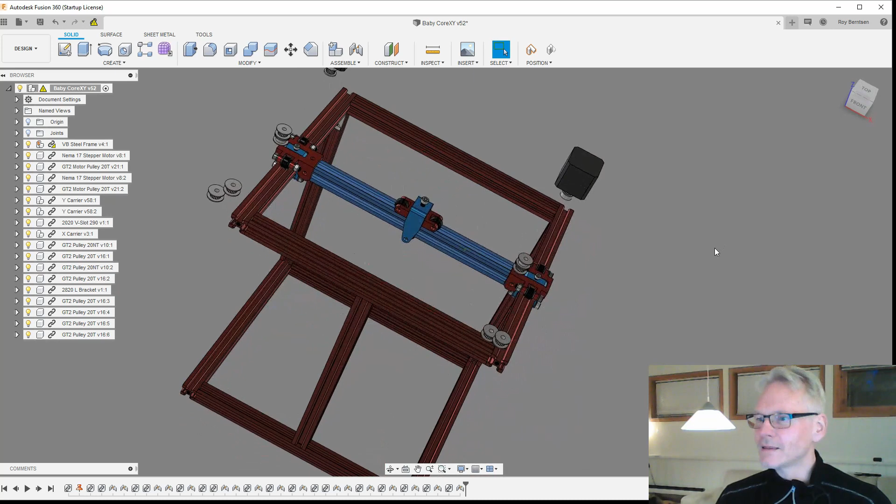So as you see now, the frame looks a little bit different. I would like to have printed parts on this, but not everyone has a printer able to print those big parts. So I decided to let's at least see how it looks like, all framed with the extrusions. So that's what I'm going on.

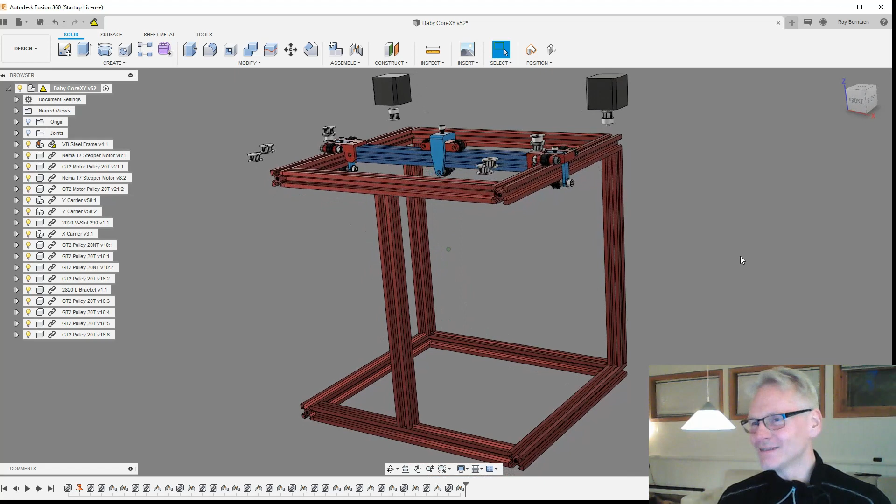I'm still going with the one front wheel. I know you're skeptical about that, and I don't know, maybe it don't work, maybe it does. Let's just figure it out. This is a sketch, and I'm thinking out of the box.

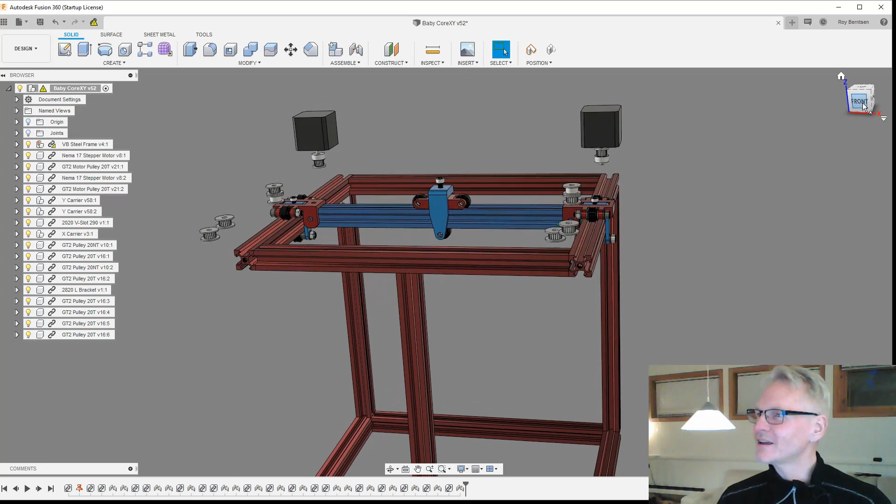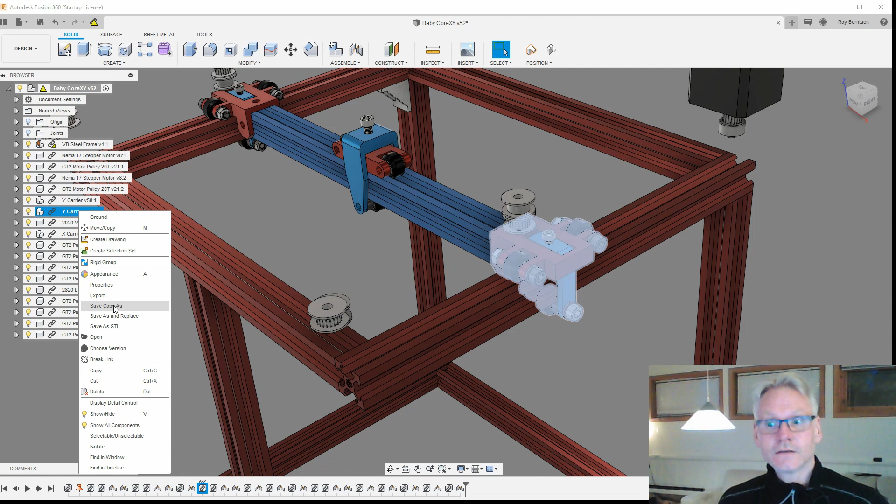If you did see the last vlog, I had some big issues with Y carriers and placement of idlers and the belt path. Everything was supposed to be very simple, quick, easy to print, with a limited amount of support, preferably none. And also, what's important to think about when designing for 3D printing, you need to think about alignment and orientation of parts.

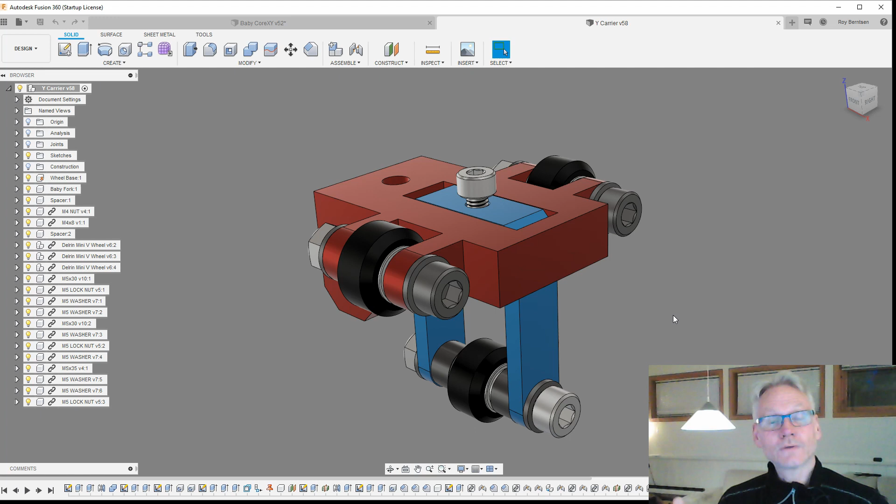I've been through a lot of iterations, and I almost gave up on myself. Then I designed something very complex, too many parts, and it worked. I had the tension screw at the bottom. We can have a look at it.

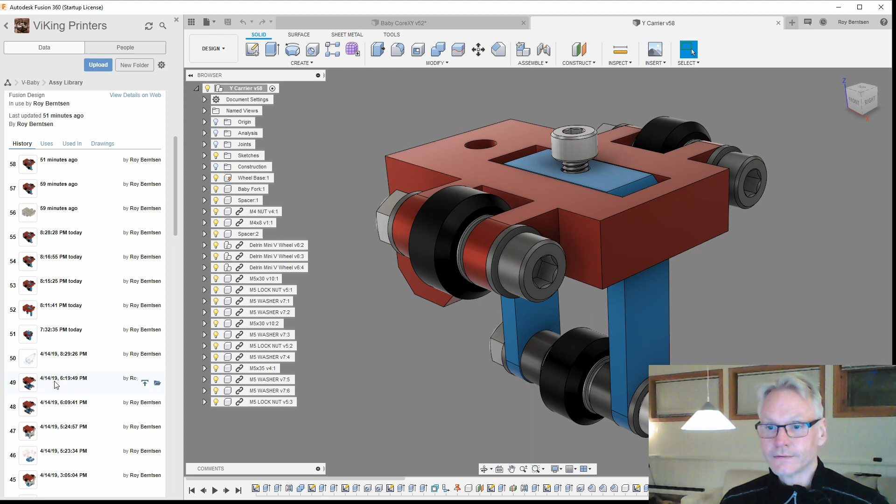As you see, I'm on version 58 now. That just means I saved a lot, too much probably. If we go back to iteration number, let's see, yesterday or the day before, number 49. Let's open iteration number 49 and have a look at that one. So this was something I was playing around with, and it works.

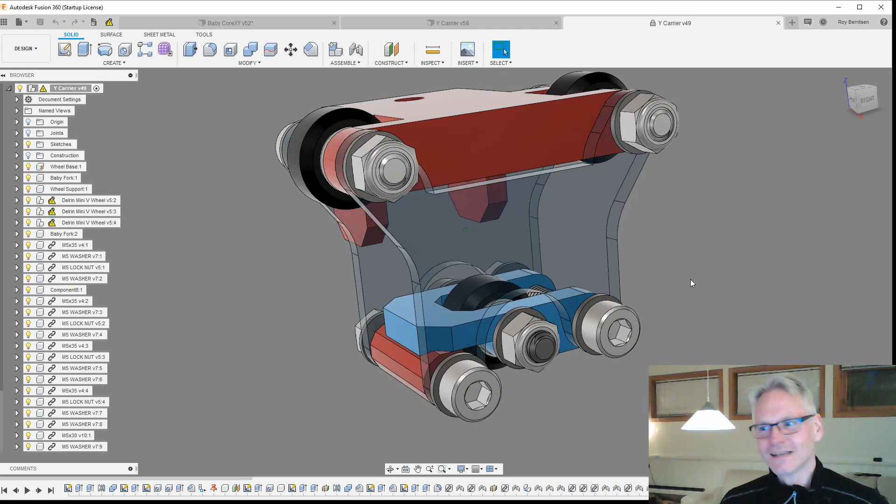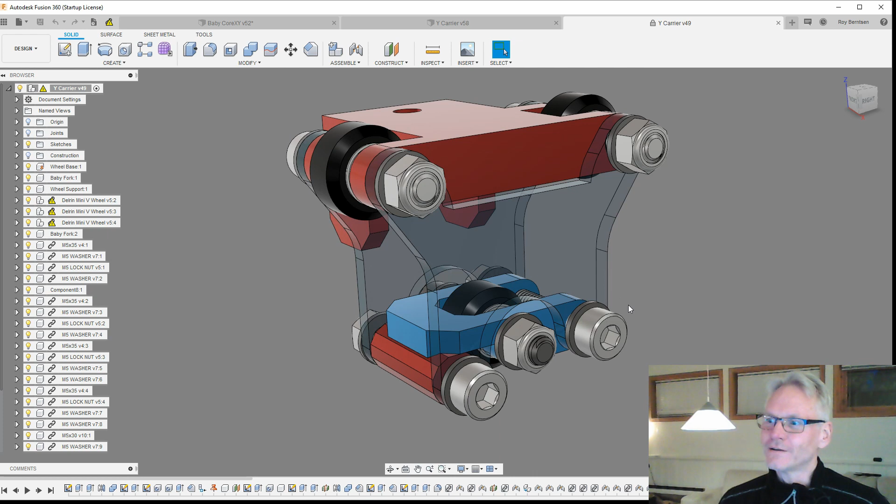I don't like eccentric nuts, eccentric tensioning, and that's why I'm struggling so much, because it will be very easy to just implement eccentric nuts into this design and solve it that way. I don't want it. I had it before and it's a terrible solution. So that's why I have the fork on the Viking. Check out the Viking if you didn't.

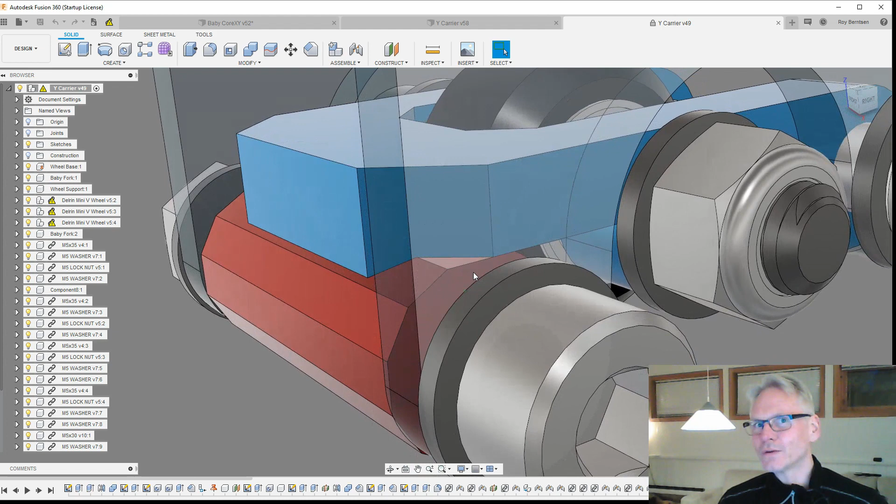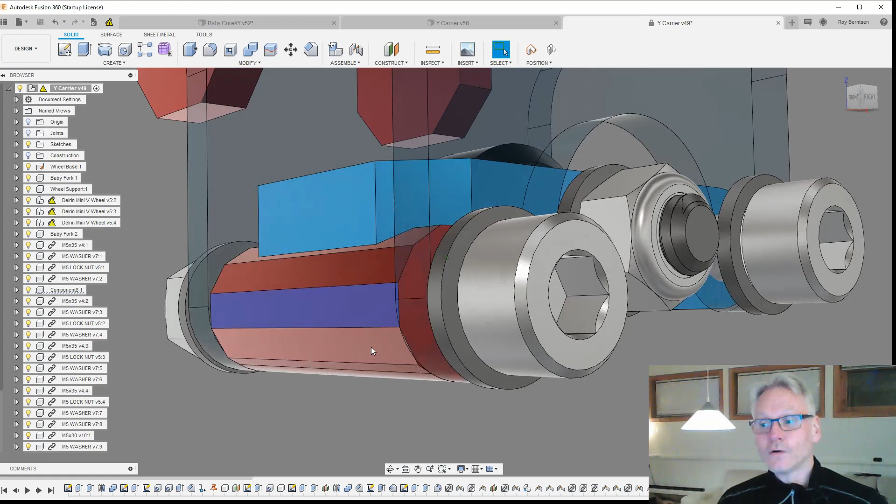So anyway, I came up with this idea with something eccentric, but it has these flat spots, so it stops with increments of 0.1 millimeter for each flat spot. The first flat spot is dead on, and if you want a tension of 0.1 millimeter, you turn it 30 degrees, then 30 more degrees you have 0.2, then 0.3, 0.4, and 0.5. That should be more than enough, way too much, but then you have increments, and it could work. I have not tested it, because I just saw that we are getting too many parts, we are getting complicated, we are not easy.

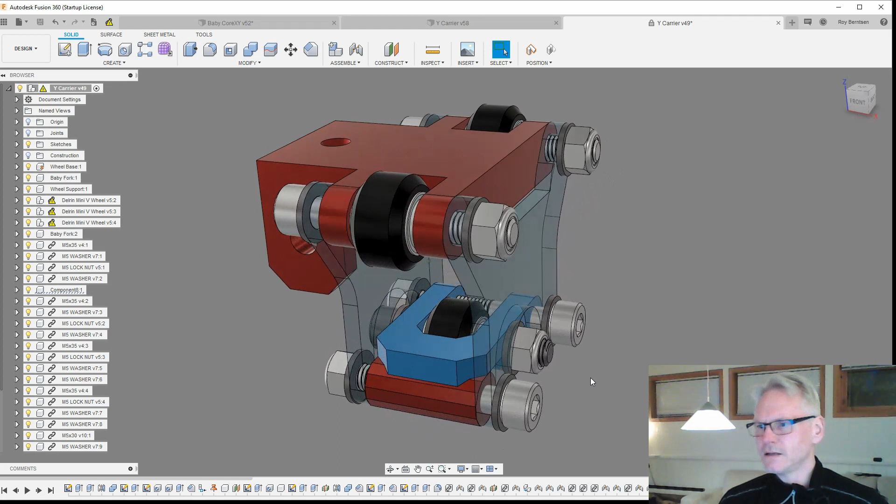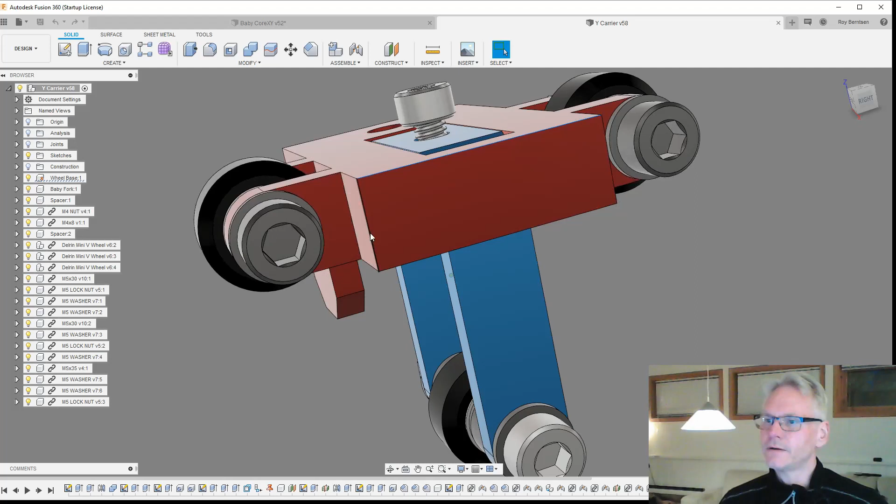We are printing without support. That's nice, but yeah. So I went back to the drawing board and looked at my fork design and thought about, hey, why don't we dig the fork into the wheelbase? Because the wheelbase is 10 millimeter. It doesn't need to be, we don't need 10 millimeter for supporting these guys. So I dug 5 millimeter down into, let me take away the fork.

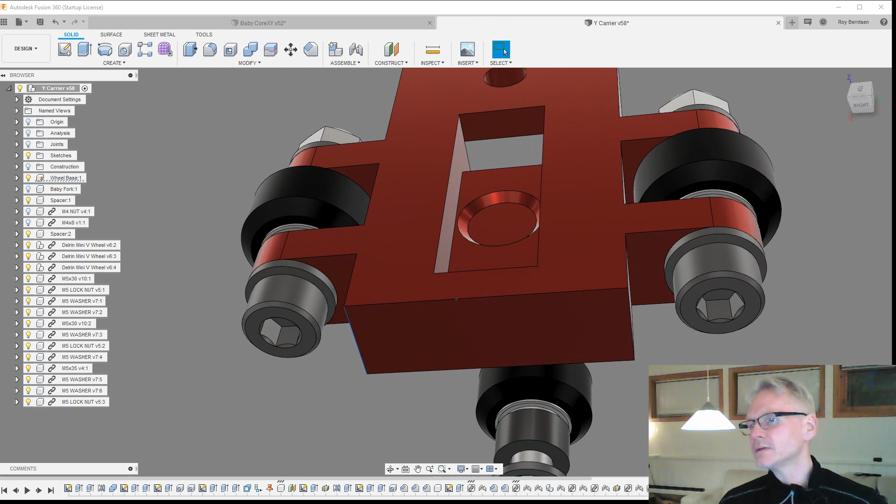So this is how it looks like down here. Let me take away these guys as well. So we are going down into the slider, and we are keeping 5 millimeter in the center here. That should be more than enough. We also have the fork to support everything, and the tension is not that big.

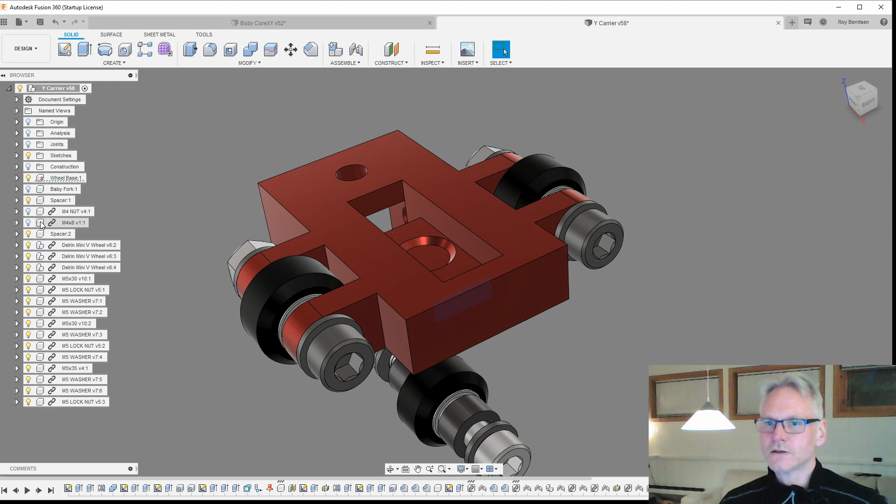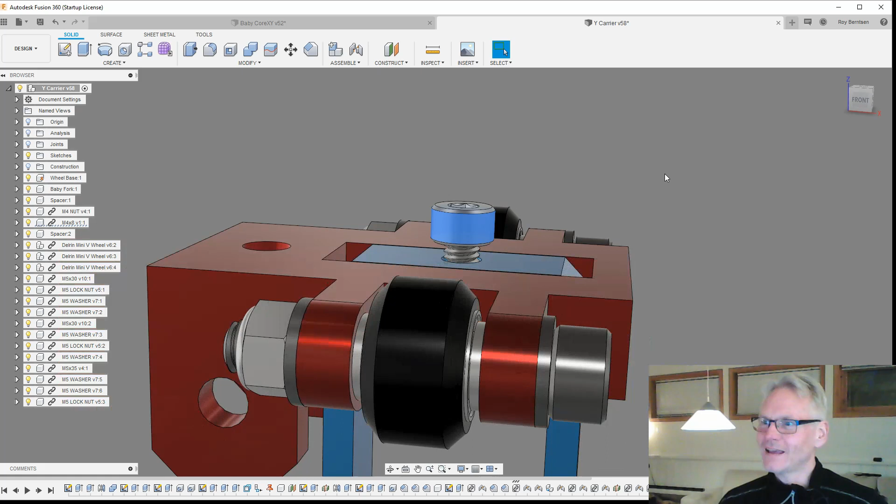Went with M4 here. M3 I think would be a little bit tiny, but M4 nut and M4 by 8, and then suddenly we are riding very low again, which I like. And now placing those onto the V-slots, guys. Of course, exciting what I did, and we can have a look at how that works out.

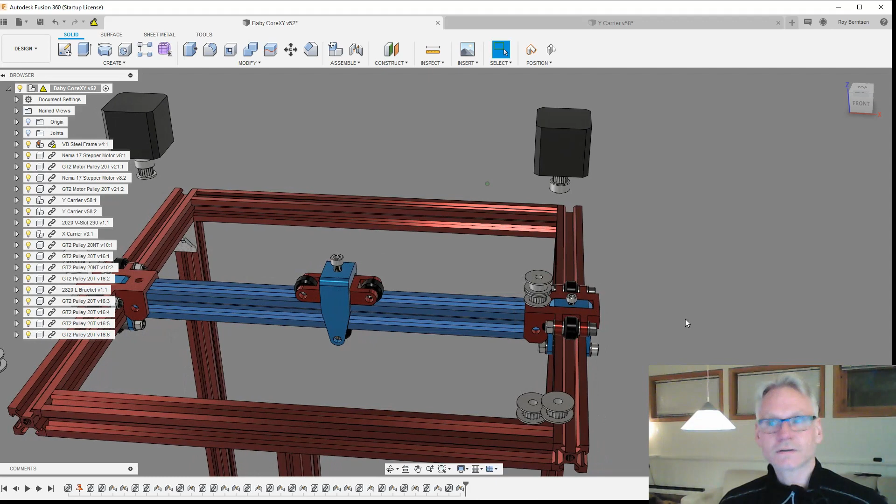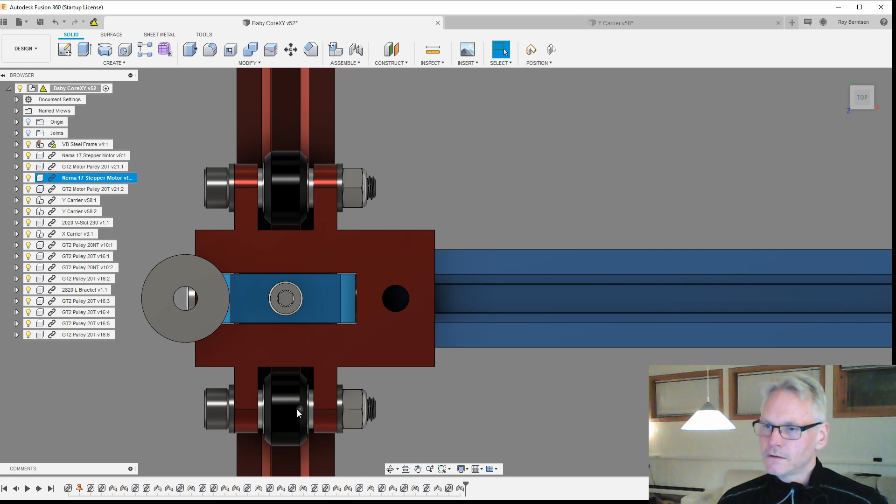So here are the guys looking fine, and I have two solutions, one on the A side and another one on the B side. On the A side I go on the inside, on the inner side. On the B side I'm just testing the path on the outer outside of the wheels, and here is inside of the wheels. And if we go outside of the wheels as on the B side...

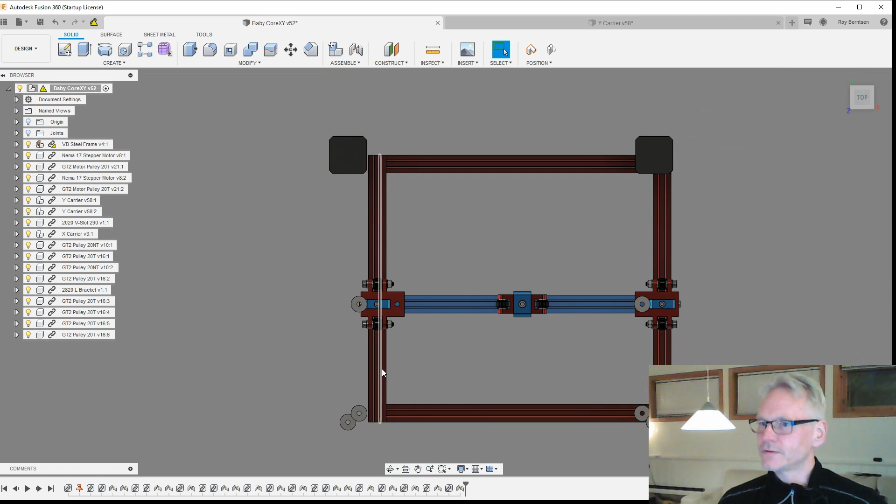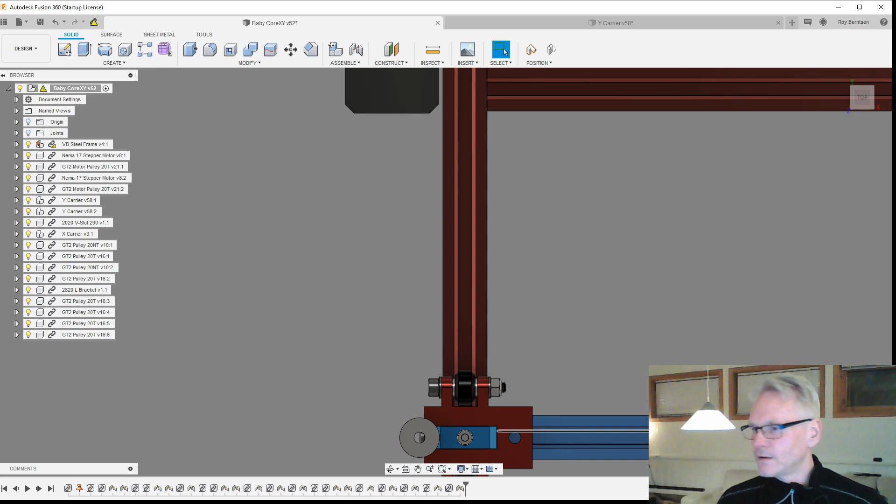Again I'm gonna try to talk about how the belts run for those of you who don't know this stuff. Let me just make this one visible. So this is the pulley, and the belt comes on the outside of the pulley and around and over to this guy, and then over to the X carrier.

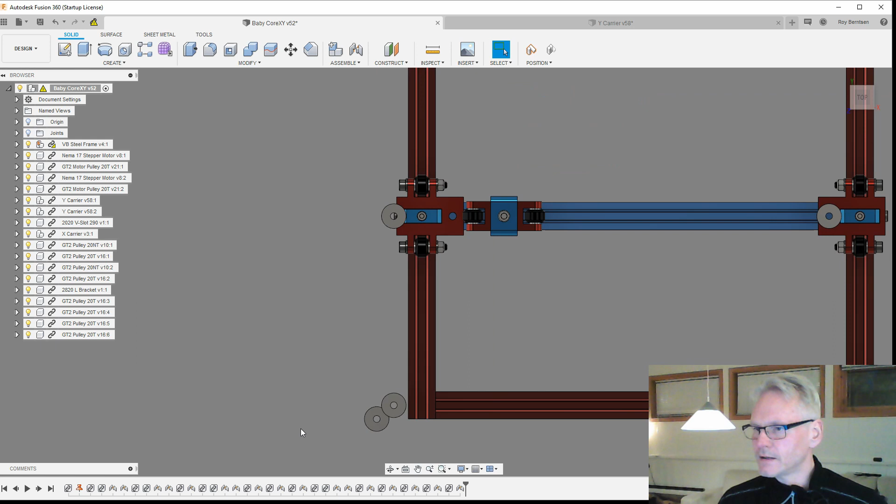On the outside, I talked about this last time as well, but let me repeat it very quick. On the outside we have the belt path just passing through all the way to the corner here and around this guy, and then over to this guy, and then it goes to these guys and over to the X carrier again. So yeah, that's complicated, I know. I'm not gonna mess with that anymore.

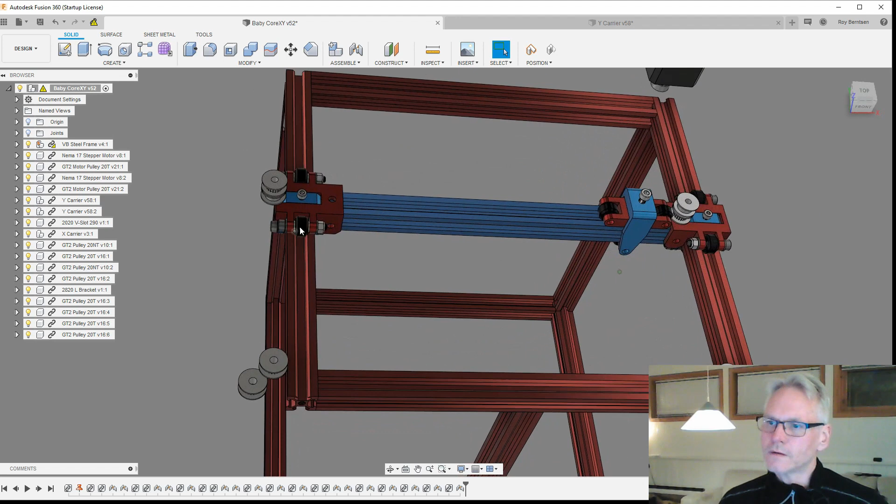But what we see, we could go on the outside. That means we are getting, I think, too far out of the frame, because we want to keep this machine compact.

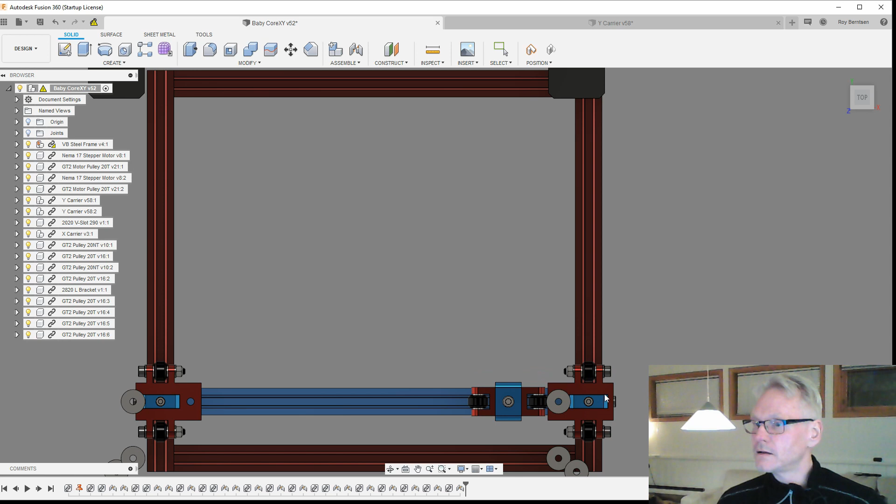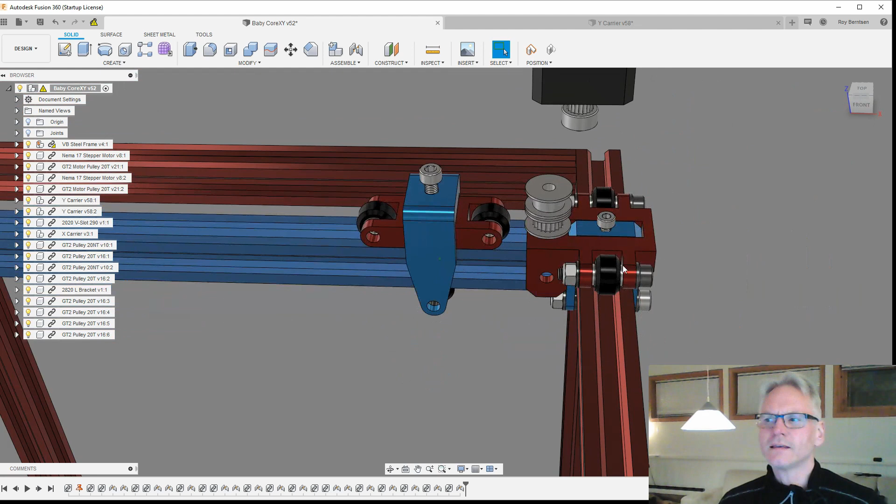If it works out like I've placed it on the A side now, we don't lose much build volume. We have the Y space, which is 180 or 200 something, and on the X we have to stop a little before we crash. So I think we'll get maybe 190, let's say 180. If we get 180 by 180 on this machine, I think that's good enough for a tiny whiny CoreXY baby.

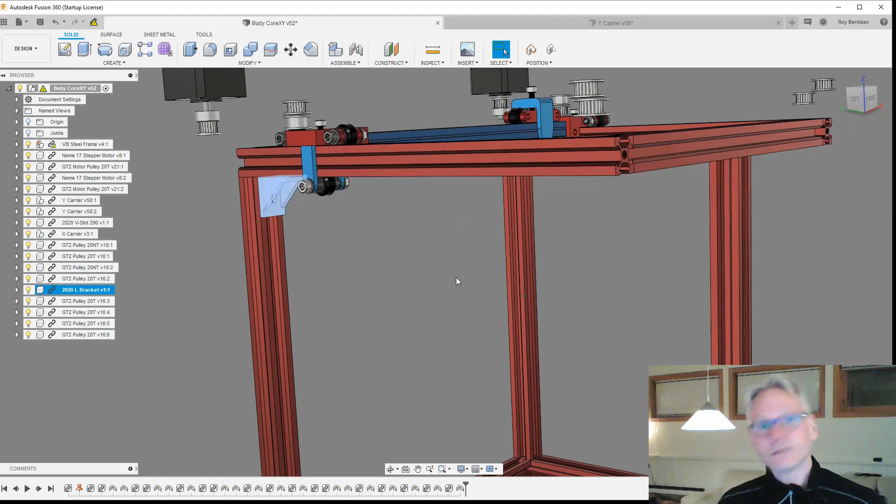And if building out of extrusion, we need some serious angles to support and connect, and they will also steal some of our build volume. I'm going to try to maximize this build volume now, just to have a look at what we can do.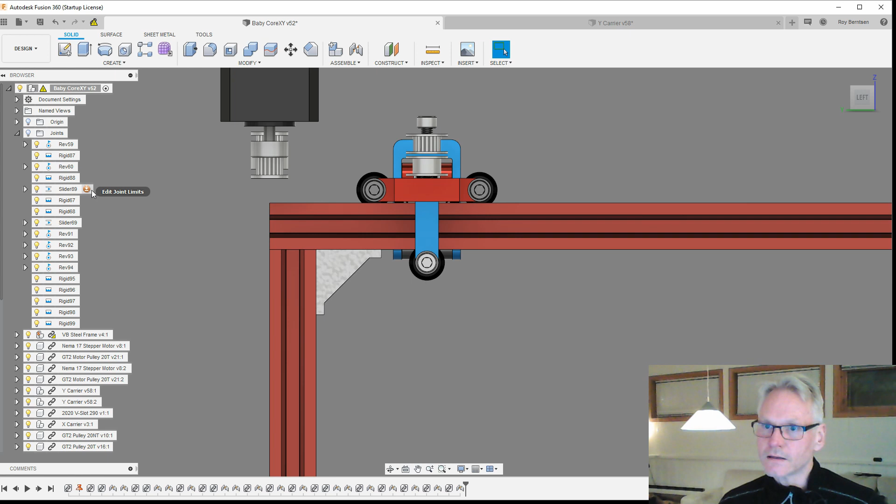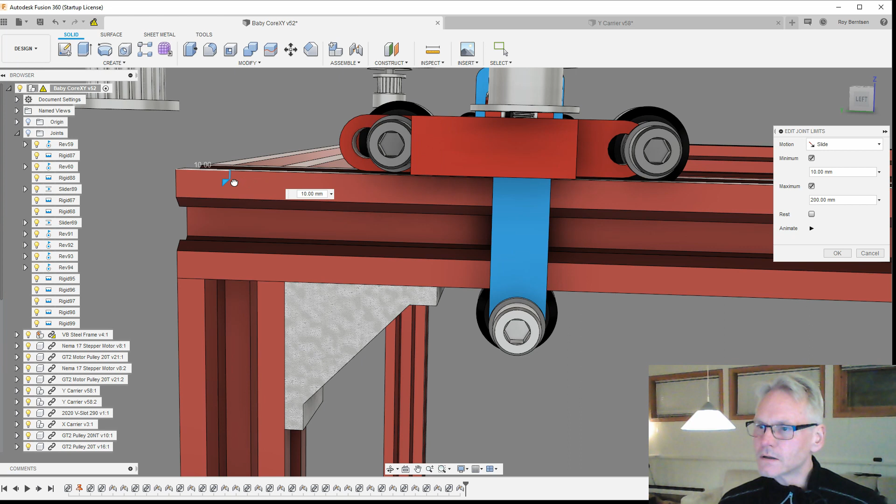So I'm going into joints. I'm going to find this slider joint, which I think is slider number 89, and we can have a look at this one. With this fork design, we can actually get more space. We can go maybe all the way over here. Yeah, let's stop there.

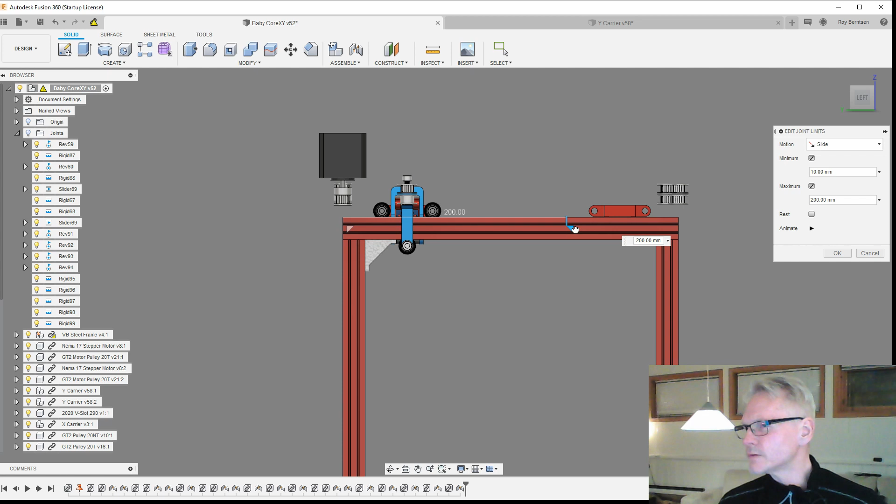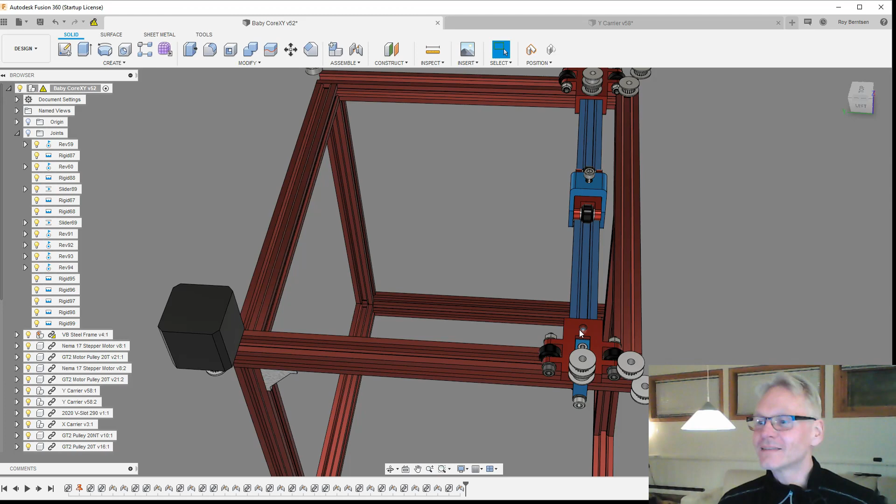And the end will then be something - I'm not sure how far out we can go. We might actually get 200 here. It looks like we are closing 200. Then we might get some interference with the hot end and the fans, so that will be our next challenge.

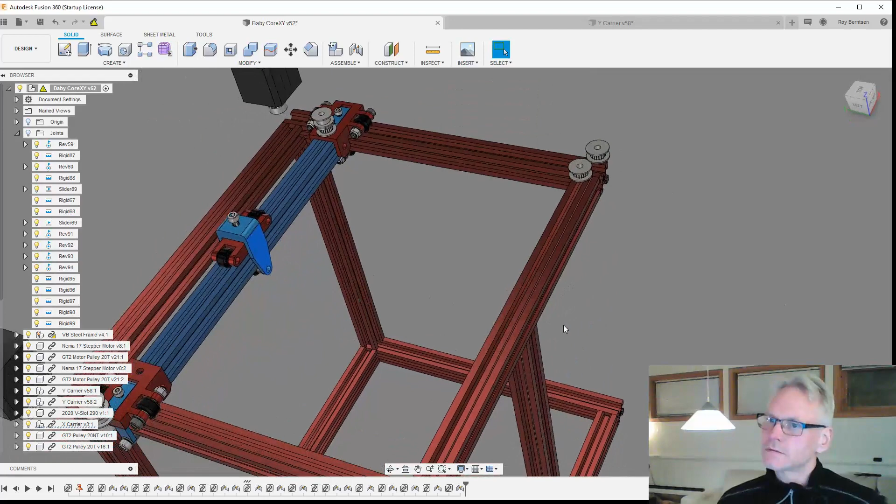I would like to have the hot end on the front side here. If we call this the front of the printer, we could have the hot end here, because it's nice to see the hot end when you have the machine standing in front of you, which I don't do on the Viking. Not a big deal, but yeah.

That's for another video, and I think I've talked too much already. But I'm thinking, what do you think? Should we go on the outside of the wheels or on the inside like this?

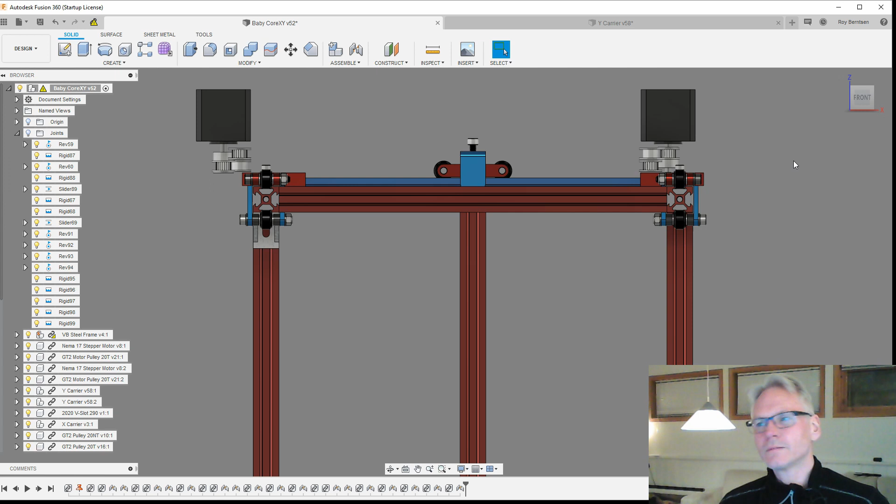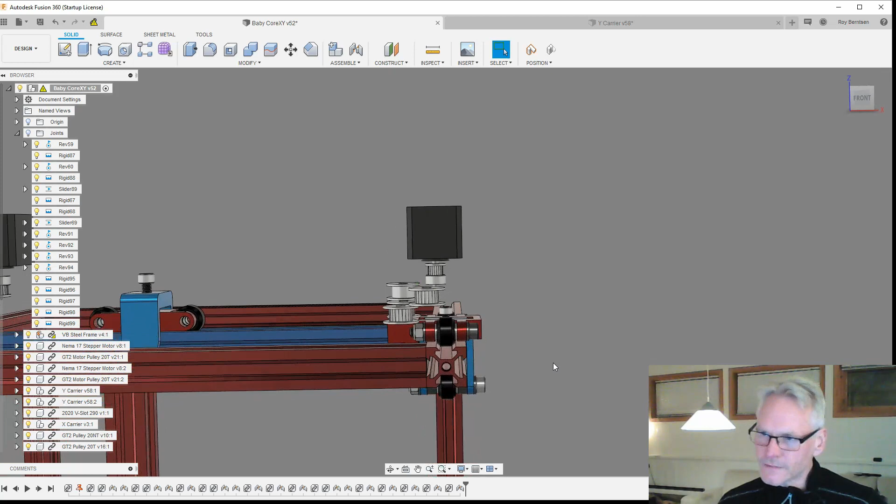My personal opinion right now, which might change, is to go on the inside of the wheels. As I can see, we don't have any interference whatsoever, and if we have some interference, I'm sure we can figure out how to solve that. There is this tension screw which might cause something at this side, but let me look into that in a later stage.

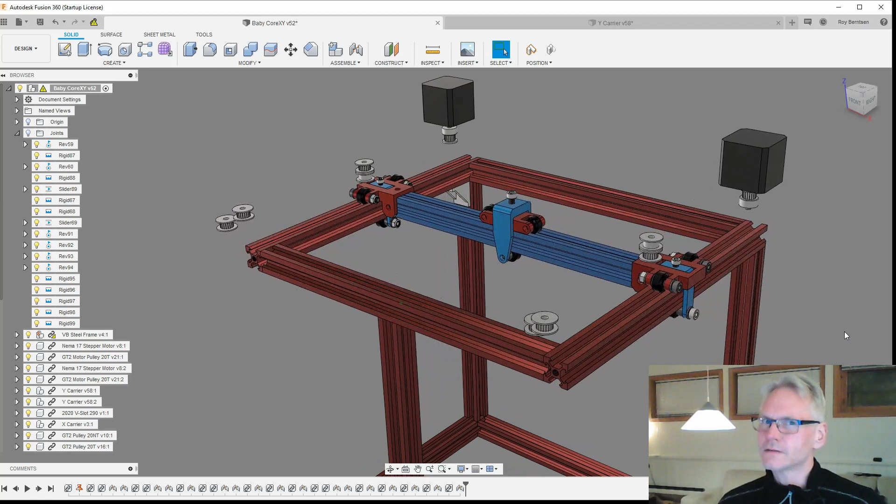So then, if we are going like this, should we have the motors upside down like this, or should I turn them? Should we have the motors downside up or upside down? That's also something I wonder about. Not decided.

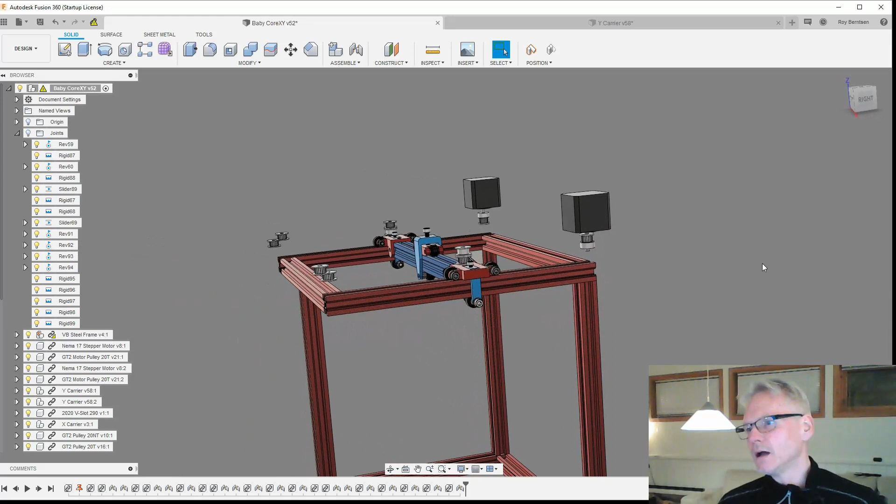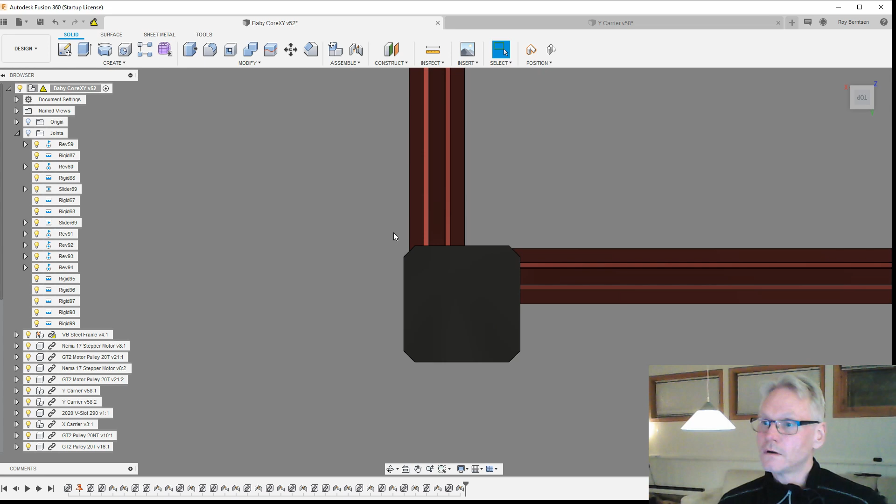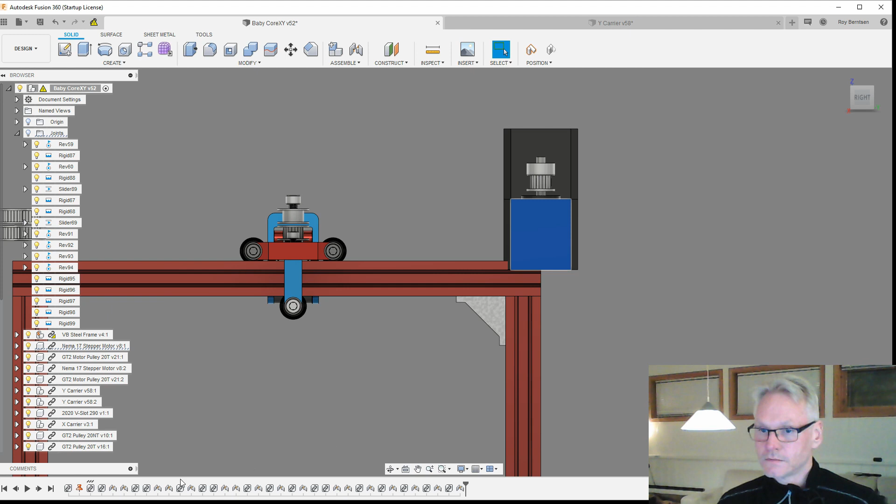I think by going upside down, as you see now, we limit the outer machine volume, because we can go on top of the extrusions. If we are turning the motor - let me turn this motor once so you can see what I'm talking about - if you flip it like this, then suddenly we have to go further down, something like, yeah, whatever, over here. And then we crash with the extrusions, and then we have to go on the outside of the extrusions.

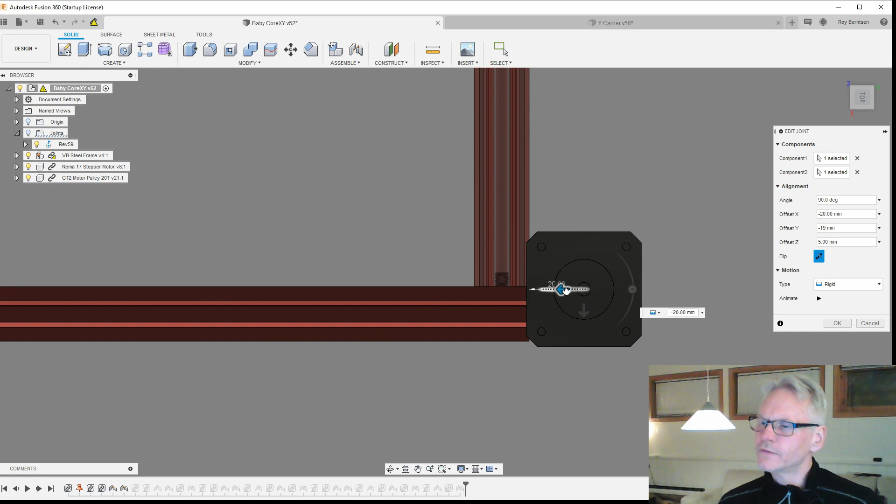Is that a problem, really? I'm not sure, maybe it's not a big deal. It depends on the motor brackets again, because we want to design the motor brackets without any support, and they need to be printed in a way which gives them strength.

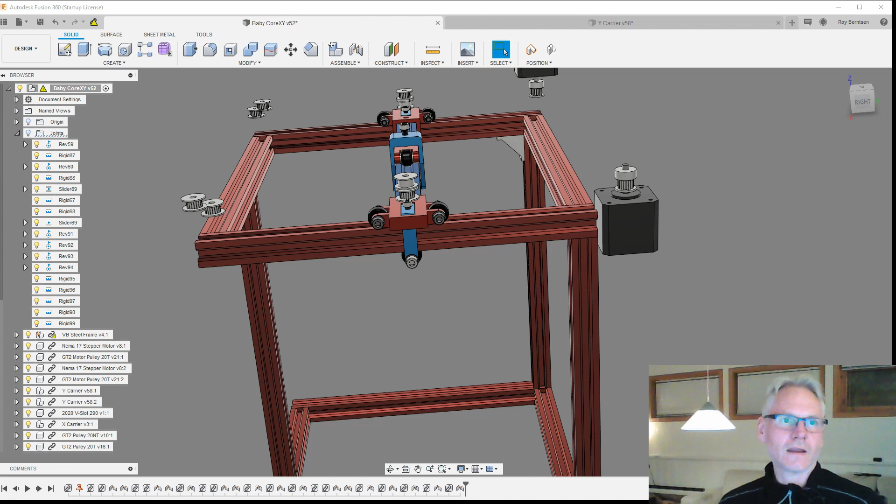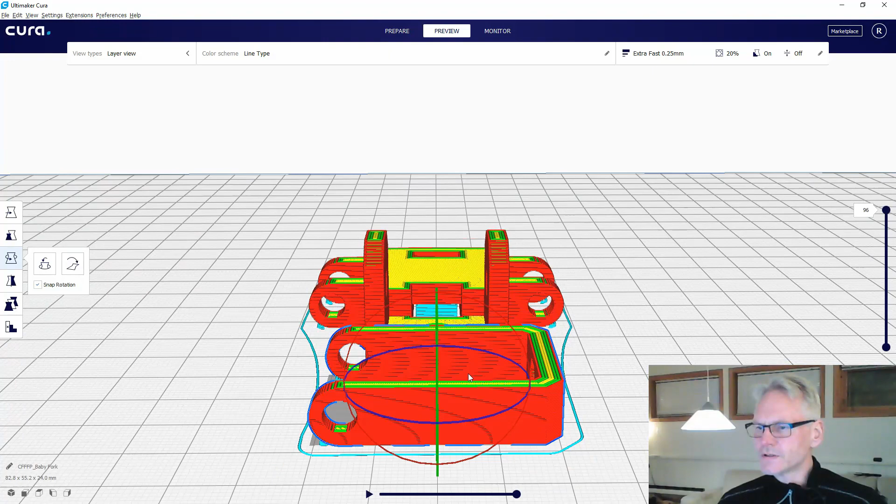When I talk about strength, I'm going to bring out Cura, because when you design parts for printing, you need to think about where the parts get pulled or pushed or stretched or influenced by forces. These forks here get pulled in the horizontal direction, and since they sit like this on the machine, the forces will be vertical at this point.

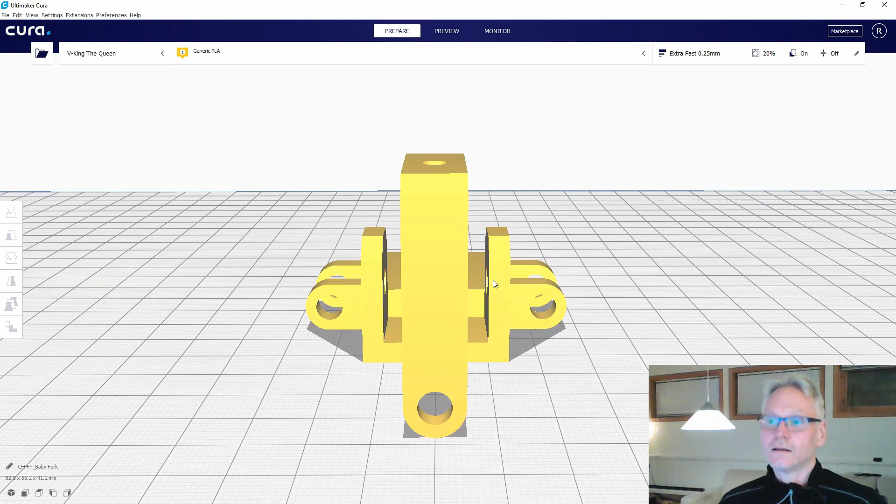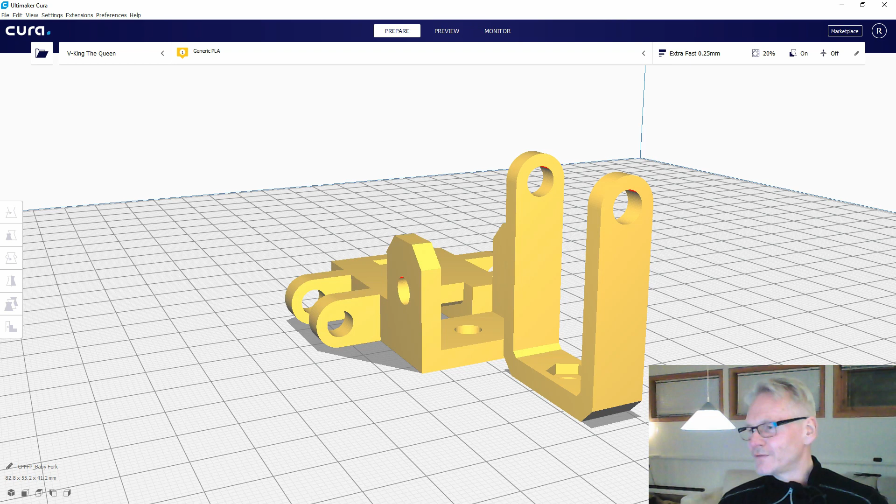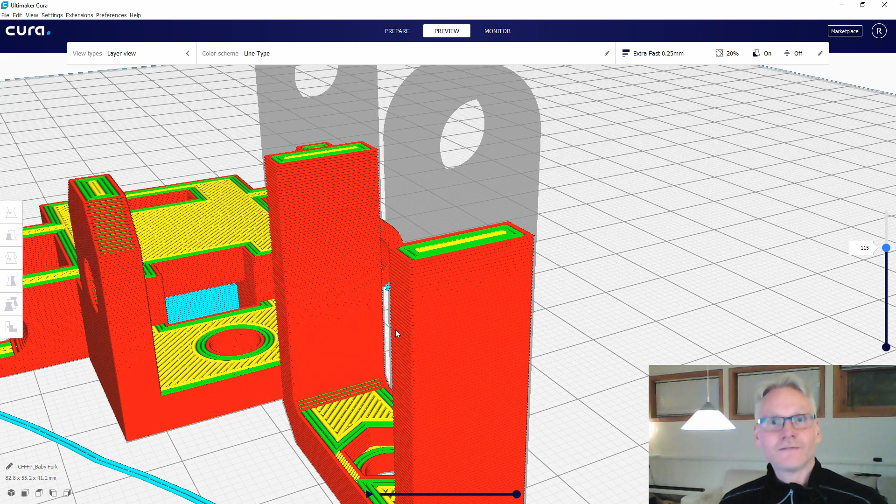But let's say, if we printed this fork like that, let me just place it like this - if we printed this fork like that, we'd have layers going all up through the fork, and those layers don't have the best adhesion. Of course they're glued together, but all these layers you see are ripping points - places where the parts will fail. If the parts fail, it will fail between the layers.

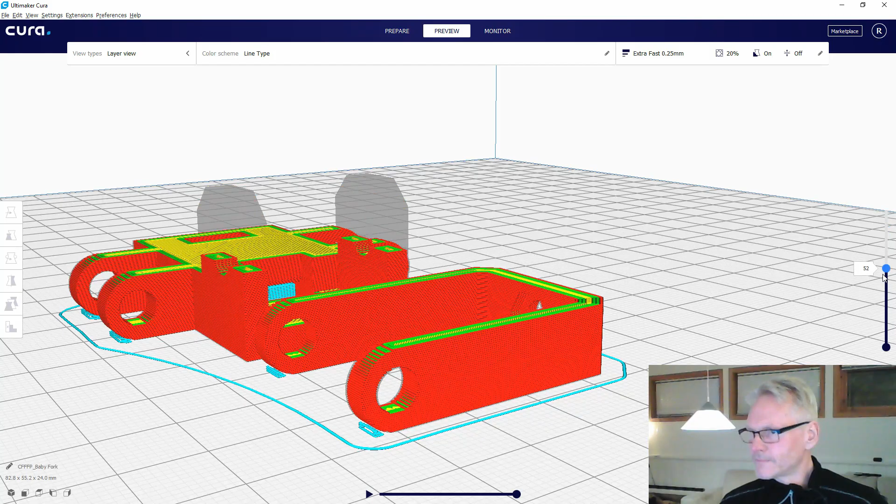So that's why we want these parts, or parts influenced by forces like this, laying down, printing down like this. Then the layers are in the same direction as the forces on the part, which is nice, and we have much more strength in the part.

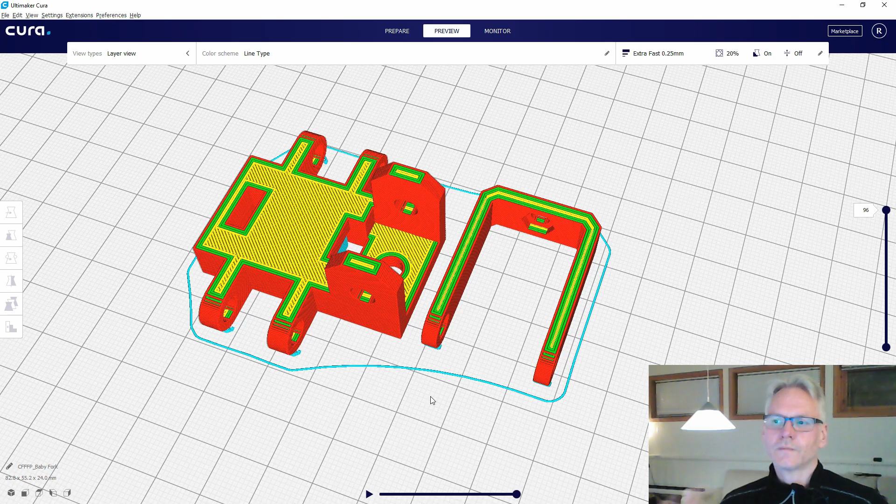And also these parts, I would like them to be able to be CNC'd easily, so this design could be CNC'd in aluminum or whatever. We did have to use some support on this guy after integrating the fork into the carrier, but I think we can live with that. Let me know what you think.

This is not like a big step since the last vlog. I mean, there's been a lot of work done - you don't see much of it, but there's been a lot of thinking, a lot of planning, a lot of wondering about what's smart and what to do, how to make it easy or complex, and so on. So yeah, that's the way it goes when designing something mechanical that all fits together.